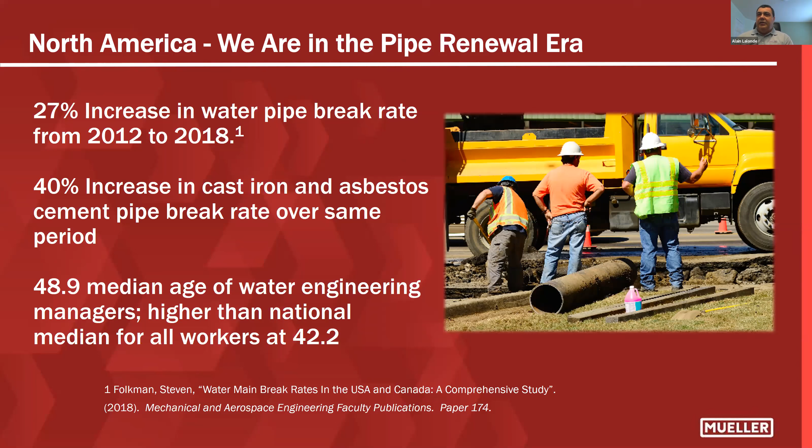So there's a lot of knowledge that's about to retire. It's really important for utilities to take that knowledge and make sure they get it out of those water operators, because as they leave, the new managers and engineers coming up behind them are going to be faced with a real challenge replacing and renewing these pipes in the ground.

If we look at managing our pipe renewal, it's a real balancing act, because we want to be able to extend the asset life if we can. If we're able to make the asset live a little longer and not have to replace it, there's obviously a benefit to that. But we also know that at one point we have to renew our assets. And if we look at the group that deals with asset life extension, there's a lot of water loss and real loss management programs out there that tend to help extend the asset life.

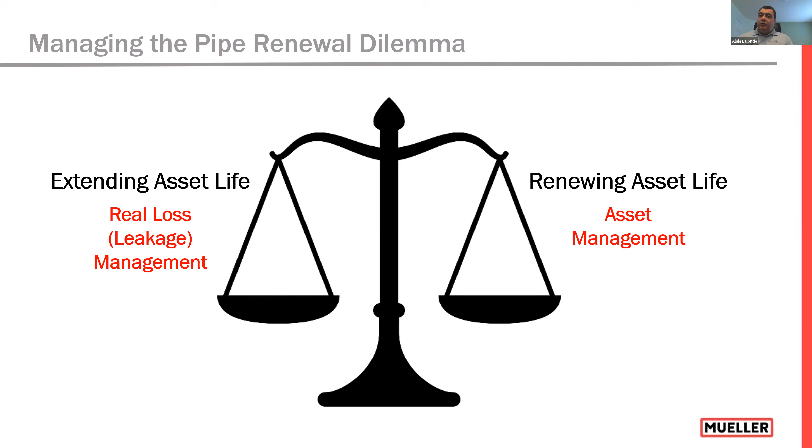On the renewal side, it's really the asset management department and municipalities that dictate the capital improvement programs and the budgets associated with that. What I've seen in my experience is that because those groups are on either side of the balance, they often don't share the data. There's definite synergies between those two groups that need to be shared and discussed, because the information of one or the actions of one affect the other, and the information gathered by one is very useful for the other group to make decisions.

So if you look at the real loss management side, those of you familiar with the IWA and AWWA water loss methodologies are very familiar with this particular graph. When you're looking to reduce leakage in a distribution system, you're looking to do 4 key things.

Obviously, you need to go out and do your active leakage control. You need to be active at finding leaks, and once you find them, you have to repair them, in a timely fashion and with quality repair materials so that the leaks are controlled properly.

And then there's pressure management. If you're able to manage the pressure and the stresses on your distribution system, you're able to reduce the level of loss. Pressure management is really one of the key factors to help extend the asset life in your distribution system. But last but not least, there's pipeline asset management, because at one point there's only so many Band-Aids we can put on a distribution pipe—we have to replace it eventually.

But you have to do all 4 of these components in harmony, and the harmony is a little different system to system, depending on how it's made up and the conditions in your particular distribution system. Some of us—I was one of them—were purists on the leak detection side from the start of my career. I didn't pay much attention to the pipeline asset management group. Now that I'm with Mueller and paying more attention, I see the synergies between them better.

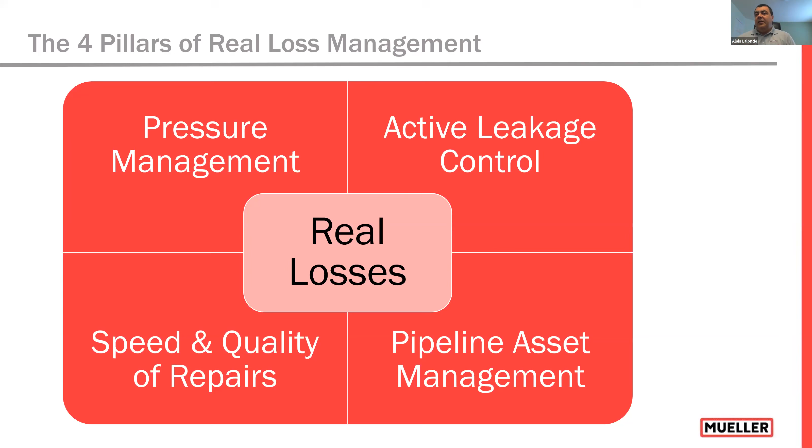There's a lot of information from water loss that needs to feed into your pipeline asset management component, and vice versa. To help us, we have our M36 manual here in North America, the Water Audits and Loss Control Programs manual, which helps prioritize programs to address these 4 key pillars to reduce real loss in our distribution system.

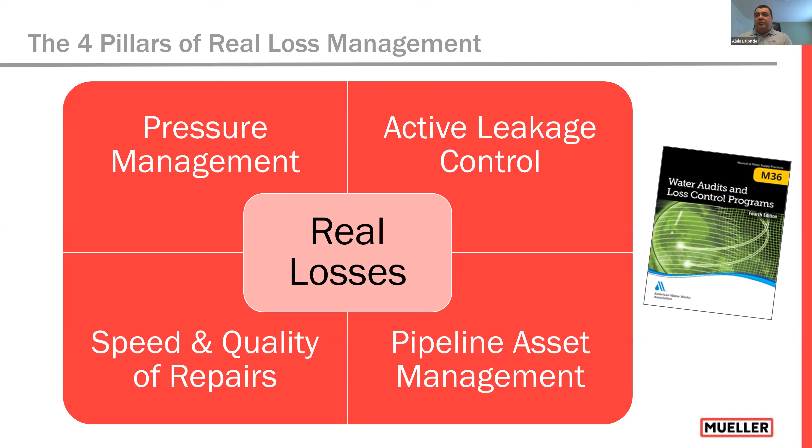When you look at asset management managers, they're dealing with determining the right amount of condition assessment to do on their distribution and transmission piping so they can make very informed decisions on their capital improvement programs. So they're looking at it from a different perspective, using varying tools to get the information they need.

And obviously it can start with a simple desktop model or using new software programs—we'll talk a bit more about some software programs that use AI and machine learning to help evaluate your system.

And the reason we're dealing with an inverted pyramid is that as you work down the pyramid, the risk associated with doing the various inspection methodologies, and also the cost of doing them, increases. So you want to apply it on a smaller proportion of your system and stop at the point where you have sufficient data to make your decisions.

And in North America, to help us deal with condition assessment, there is the new M77 manual out there that talks about the inverted pyramid method and goes into great detail on all of the different condition assessment methodologies that are out there in the marketplace.

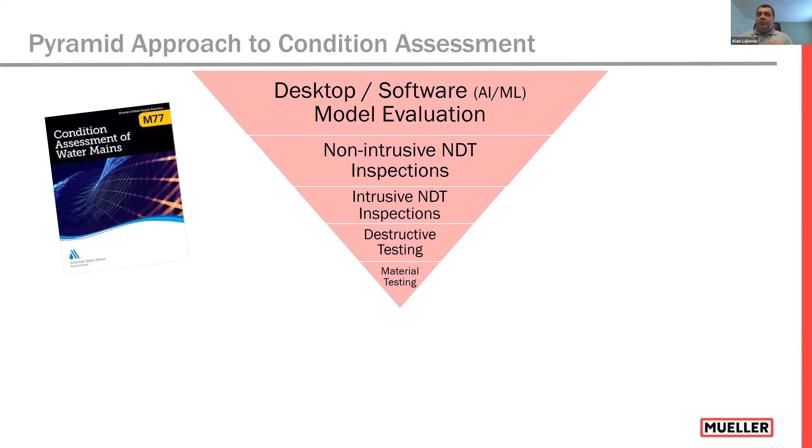Hopefully that ties the two together, the water loss side and the asset management side. On a go-forward basis, I'm going to deal more with the asset management side, and the case study I'm going to present will be more on the asset management side, but I'll continue to make ties on how that information works well with the leak and real loss management side of things.

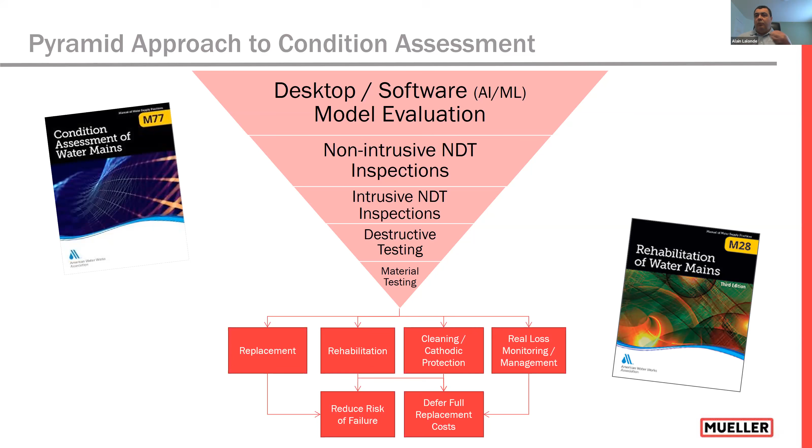To help us make decisions on which rehabilitation method to use, we have the M28 manual from AWWA that can help us decide what class of rehabilitation, or whether we should go to full pipeline replacement. When you look at making decisions, obviously if you don't have sufficient information, you can make the wrong decision.

One of our customers, Fred Pfeifer, the Water Network Asset Strategy Manager with WSSC, said something once that really stuck with us, and we've been using it in our presentations since. WSSC were at a point where they knew they were making decisions that pulled out good pipe. To Fred Pfeifer, if you're replacing good pipe, it's just like digging up money and then throwing it away, because obviously there's still asset life, there's still value to that asset.

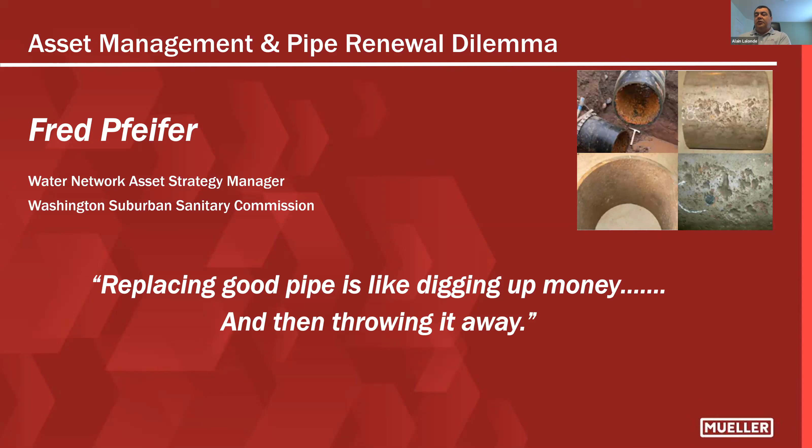So making sure you go out and get the right level of information, so that you make a more informed decision and make sure you make the right decision with renewing your pipes, is very important.

If we look here at the correlation - this is actual data from WSSC - what we plotted is year of installation of pipeline against the actual leakage rate of those particular pipelines, in leaks per 100 miles per year. If you put a straight line analysis through that data, you see that there's absolutely no correlation. So just basing strictly on age is not the best thing to do.

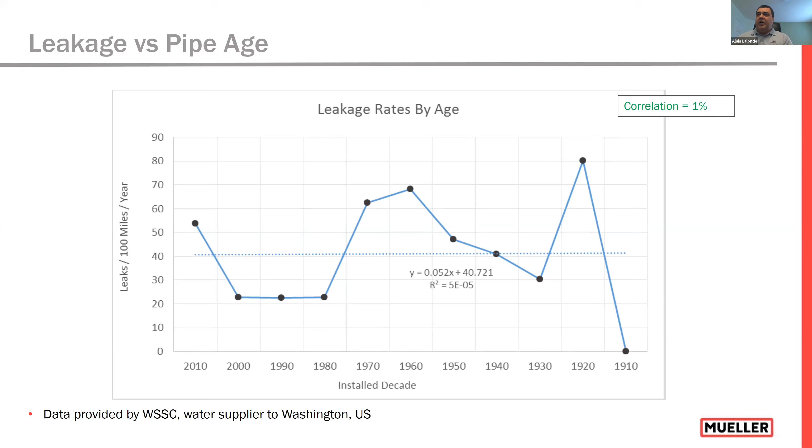A lot of utilities say, okay, I want to reduce my leakage rate in the distribution system, so obviously I'm going to go out and tackle and replace my oldest pipes in the system. Well, this graph just goes to show you that if you go and tackle just the oldest pipes, you may not have the desired impact on reducing the water loss rates in your distribution system.

So you need to make more informed decisions about which pipes to tackle first. We know as utilities now, and many of my customers have told me, that their current decision-making matrix has reached a point where they're pulling out good pipe. When we first started down the asset management road, it was very easy for utilities to identify the first 2-3% of really, really bad pipes - it's a no-brainer to pick up that low-hanging fruit and go out and replace bad pipe.

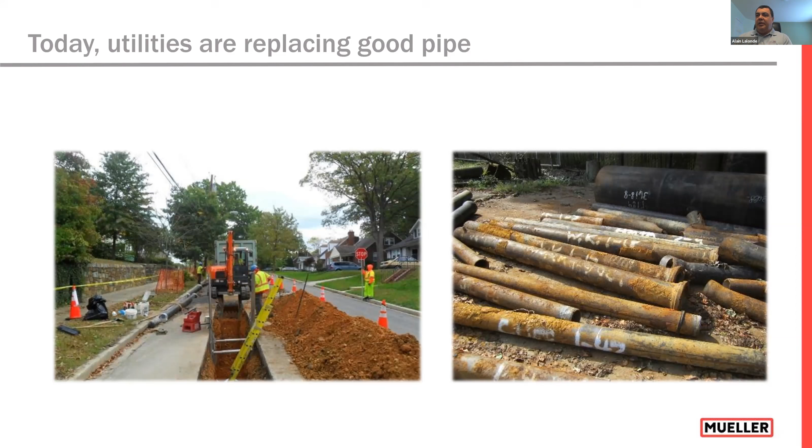But when we get into the middle, we do not know whether we should be replacing street A before street B if we don't have evidence-based information. So we have data - we have a lot of data - and that's where some of the desktop modeling tools come in.

We have data and we're trying to make decisions based on age of pipe, type of soil, and break history, and we're making rules and trying to organize that particular data so that we get actionable results. Now we need a lot of tools, and there are tools out there to really help and improve our decision-making process for analytical analysis of historical data.

That's where these new software tools come in - one I'll talk about is Pipe Insights. It's a new machine learning tool that's out there to quickly analyze a whole slew of data. Data is not the issue - we have tons of data. Interpreting what that data means, seeing trends in that data, and identifying ways to manage those trends to get better, more actionable information is where we need the help of machine learning tools.

So by learning from the pipe's behaviors, we're able to predict the likelihood of failure, and we're able to improve the data from these analysis models so that we can make clear decisions moving forward on what to do next with our particular pipes.

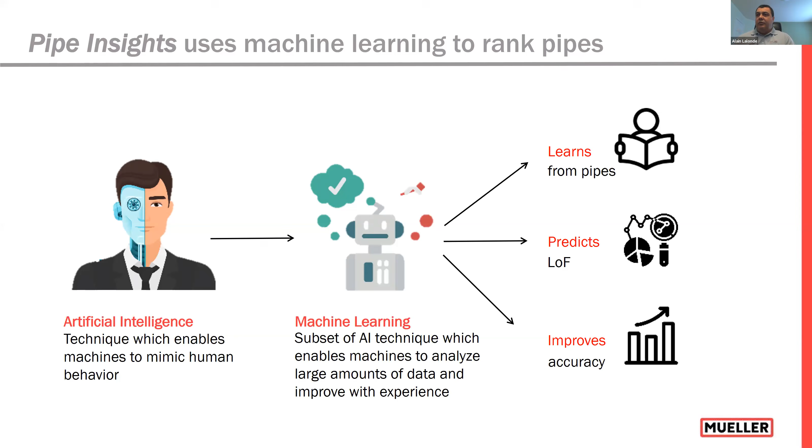If we look at Pipe Insights and machine learning algorithms in general, there's tons of utility data. Data will have GIS, pipe installation date, break history. The majority of utilities out there have gone into the digital world and have that type of information digitally. There's also a lot of public information out there - soil surveys, historical weather, things of that nature. And then each tool will have their own proprietary data sets and algorithms. They'll run all that data together to try and identify patterns.

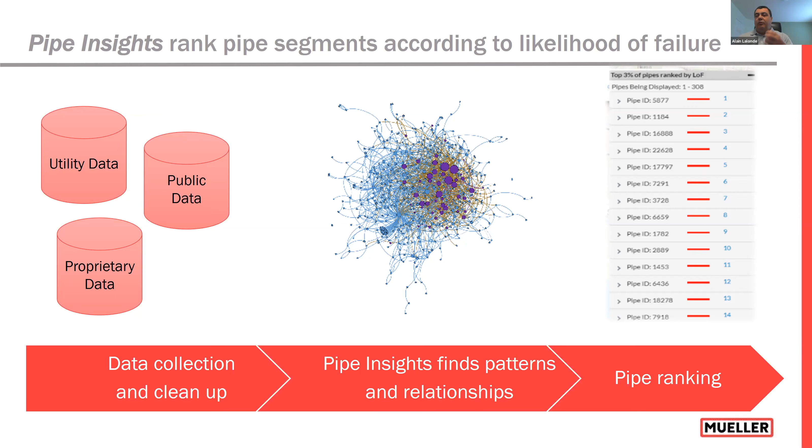From that will come the pipes most likely to fail. With that, now we can identify the top 3, 5, 10, 15% of pipes that are likely to fail, and then make decisions on those particular pipes - to either get condition assessment data, look at replacement, or do leakage monitoring. But at least now we know the worst pipes in our particular system.

So again, Pipe Insight takes raw data. Raw data is easy - we have tons of it, lots of internal data sources from the utility, external data sources, and then by using the algorithm, taking that information, we can develop a likelihood of failure.

Most software and Pipe Insights has the ability to add consequence of failure. So now you can add rules to give you consequence of failure, multiply it with your likelihood of failure, and get an even better ranking of pipes to prioritize. Now you've got actionable insights with that particular data.

You're able straight away, if you've got a very high likelihood of failure and a very high consequence of failure - you probably can't live with that, and you might make a decision to renew that pipe right away. But on the other ones that have less consequence of failure but a high likelihood of failure, you might go out and get condition assessment data, because you want to make a more informed decision of which pipes to replace first.

And then the other pipes that have a lower risk of failure and consequence of failure, you can look at monitoring for leak detection - either permanent monitoring or routine leak detection surveys - to be able to stay on top of those particular pipes as they degrade and move up in time.

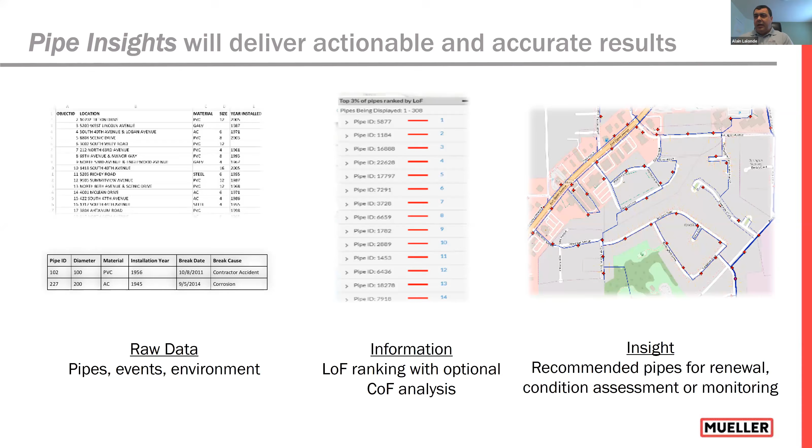So we'll look at one little case study that Pipe Insights worked on. It's not that little - it's actually a fairly large utility with 4,600 miles of pipe. What Pipe Insight did is they looked at about 10 years of historical data to predict the likelihood of failure of pipes in 2018.

The outcome of that particular analysis showed that 17 out of the top 18 pipes identified as likely to fail actually did fail in 2018. And the 18th pipe, which was actually the number 1 ranking, failed 2 months into 2019. So obviously this gives you more accurate data on your pipes and making decisions moving forward.

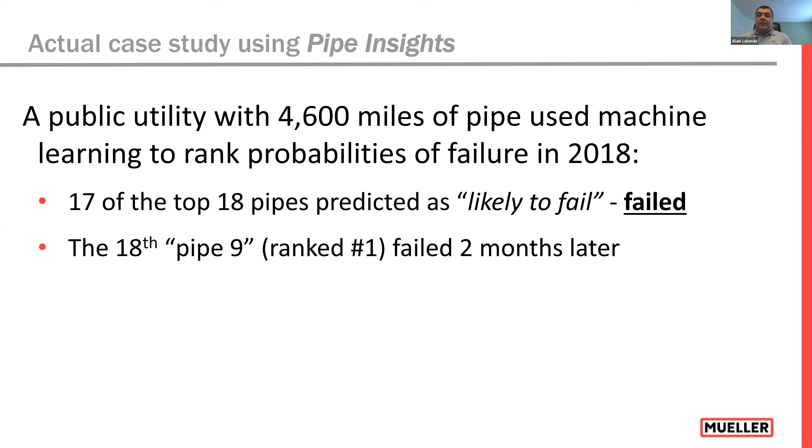This utility was Tucson Water. So they saw a new way of doing business with this particular data, and now we're more confident moving down into condition assessment, leak detection monitoring, and actually pipe replacement decision making.

So now if you take that same data that I showed from WSSC, but now you have other factors - you have actually gone out there and collected actual evidence-based condition information on the pipelines. You have age, you have soil conditions, and you develop a pipe integrity rating system. In WSSC, they've developed a rating system that includes condition assessment values between 1 and 5.

And now when you plot the rating versus the leakage, you see a clear trend. Obviously the more degraded pipes have the higher leakage rate - that's a no-brainer, of course we know that. But identifying those highly degraded pipes is really the difficult thing.

But with good pipe insights, good information, evidence-based information, we can rank our pipes, and now we can target the 4s and the 5s and do our replacement or renewal programs. And we know we're actually going to have a longer lasting effect on our water loss levels and our real loss levels in our distribution system.

We can also target the pipes that should look at leakage monitoring, and we can identify the pipes that can be deferred for several years before we even need to consider what needs to be done.

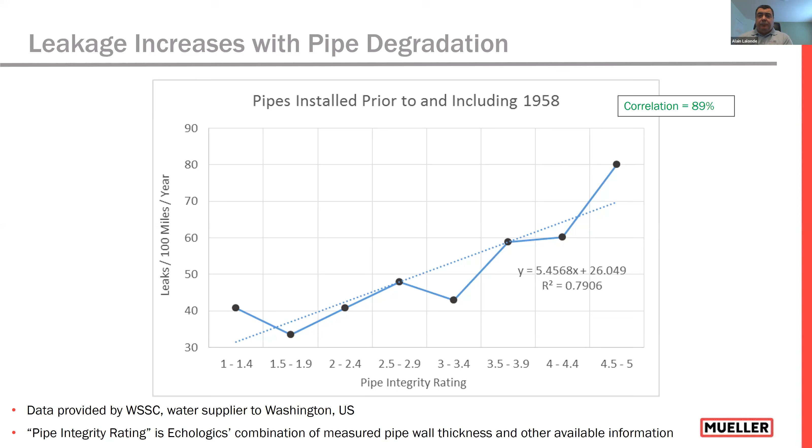So with that, I'm going to specifically talk about a case study. It's called the Region Peel case study, dealing with how they approached condition assessment and got to improve their asset management plan using condition assessment information. So just a little bit of history behind Peel region.

There's 3 major cities that are part of Peel: Mississauga, Brampton, and Caledon. And I actually live in Mississauga, right down here in the bottom corner. That's where we had the snow this morning. So for any of you that miss snow, you can come live in Mississauga and you'll get snow in May.

Little known fact is that Peel region is actually the third largest water utility in Canada. They service almost 1.4 million people. Only City of Toronto and City of Montreal have a bigger population base served with their distribution systems.

If you look at just the distribution pipes, there's about 2,500 miles of pipe, varying in size from 2 to 16 inch. We're excluding their transmission and feeder main system. They also have about 300 to 400 kilometers of transmission and feeder main, but we're concentrating here on the water distribution network. It's a really new system.

If you look at the development in Mississauga, Brampton, and Caledon, it's very recent, within the last 25 to 30 years, and predominantly it's all PVC mains. But if you look, they still have about 12% of their distribution mains, or about 315 miles, that are older metallic mains, ranging in size from 6 to 12 inch.

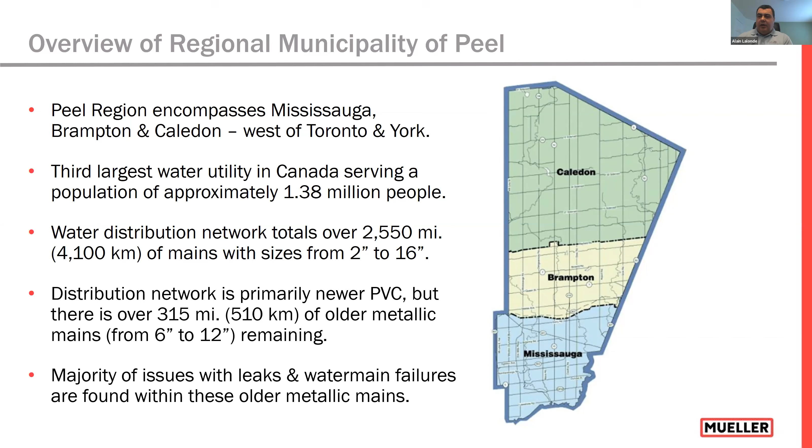So in Peel, they've adopted the State of Good Repair program. Many municipalities have adopted a State of Good Repair program. It's developed by the Good Roads Association here in Canada, and a lot of them are following the best practices in those particular guides.

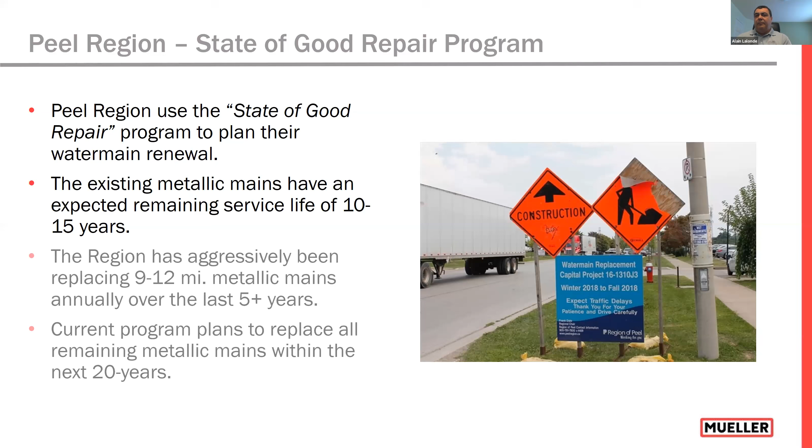If you look at traditional timelines associated with the types of pipes that they have in the ground, they figure they have about a 10 to 15 year remaining service life span. Doesn't mean that it's their actual useful life, but just based on age, they have about a 10 to 15 year plan. So over the last 7 years, the region has been very aggressive at replacing mains. They replace about 9 to 12 miles of mains per year, and are planning to replace all of the remaining metallic mains over the course of the next 20 years.

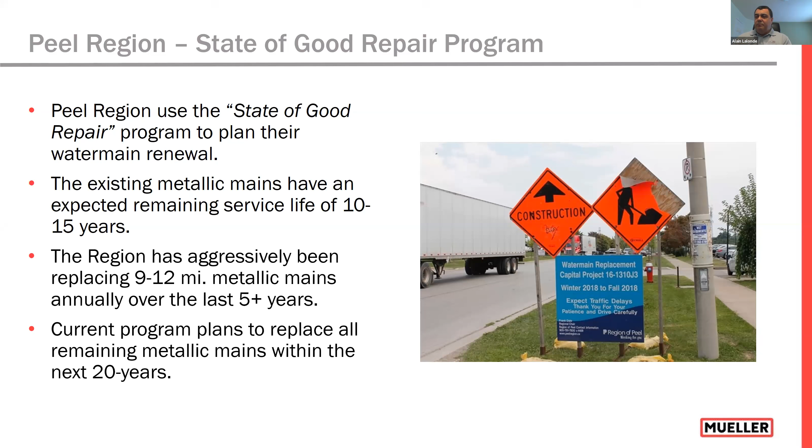So they knew the bad mains in the first couple of years, but they noticed that in the last years, they were starting to replace mains that maybe didn't really need to be replaced. So they were looking at their current matrix, and their matrix is totally based on a desktop analysis.

The 4 key parameters that they look at is pipe age. We saw that pipe age is not maybe the best indicator of pipe condition. They use a break frequency. So if a segment of pipe has seen more than 4 breaks since it's been installed, it's automatically lumped into a high rating for replacement or renewal program.

Obviously, hydraulic limitations and pipe criticality play into it, and whether the cities are also planning to do adjacent utility renewals for storm and sewer. But no, they've never had any actual evidence-based data on the condition of the pipes to make their decision.

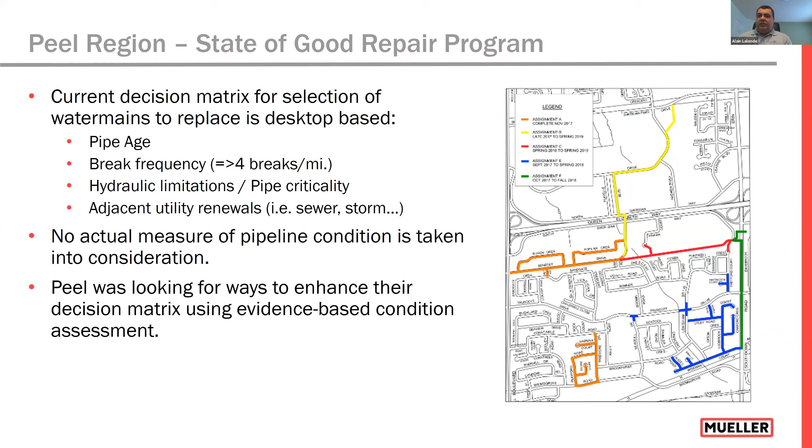So as they started pulling out pipe that was actually in good condition, they knew they had to look into something to help improve their decision-making matrix, and they had to bring some real condition assessment information into the mix. So they did market research out there of what was available for smaller diameter mains, and decided to do a pilot with the acoustic wave methodology from Echologics.

For those of you that are not familiar with acoustic-based pipe assessment methodology, it's really based on the correlation methodology from leak detection. So as you know, when leaks or flows or noise is induced in a pipe, it actually vibrates the pipe material and creates little acoustic compression waves in the water that compress and decompress as it moves down the water.

And it will actually flex the pipe material at a microscopic level. And those are the vibrations that we're picking up with our correlators to be able to pinpoint leak locations.

But if you take this principle, and again, when we do correlations, it's based on average velocity tables for average pipelines. But if you look at a pipeline that's brand new, if you've got a new metallic pipeline, it's very rigid, it's thick, it's got its full hoop structural strength. So it's going to resist that acoustic wave being propagated down that particular pipe.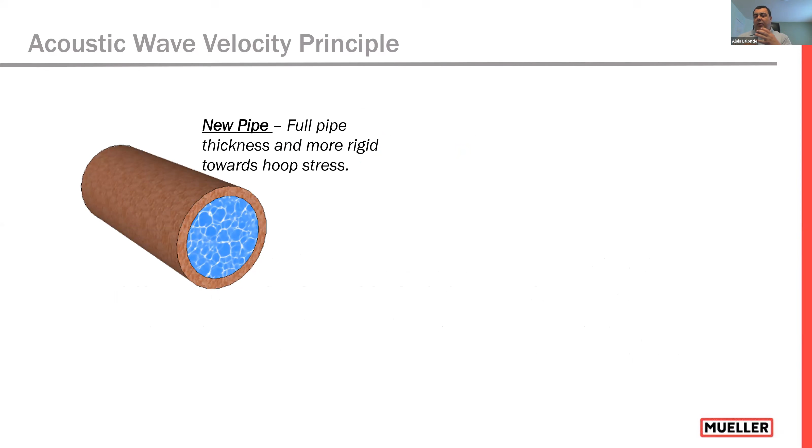But as a pipe degrades, it corrodes, it graphitizes, it starts losing effective thickness, and the actual structural thickness that remains is a lot less.

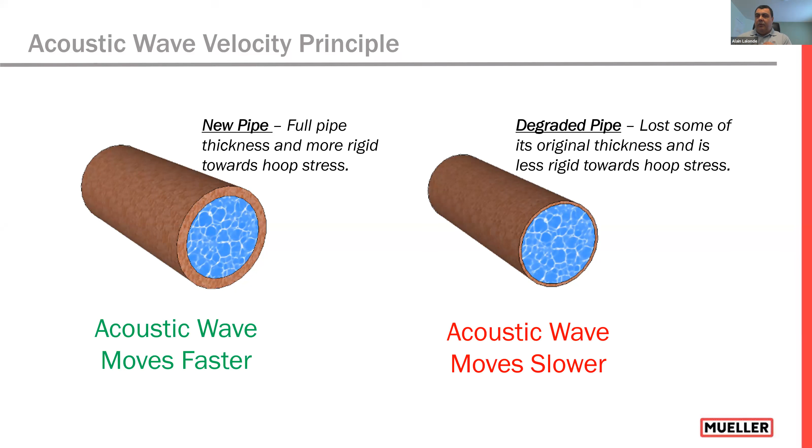So it will flex a lot more to the acoustic wave that travels through that particular pipe. If you're able to measure those waves, you're able to determine the amount of degradation, because an acoustic wave will travel much faster in a brand new pipe than it will in a degraded pipe. That's the principle behind the acoustic wave methodology for determining remaining wall thickness.

The setup is very similar to a normal correlation setup. We set up our transmitters on two connection points, demonstrated here by connecting to fire hydrants. The only difference now is we are inducing noise into the pipe. By activating a fire hydrant, either by flowing a small flow or tapping on it, we're actually inducing an acoustic wave into the pipeline.

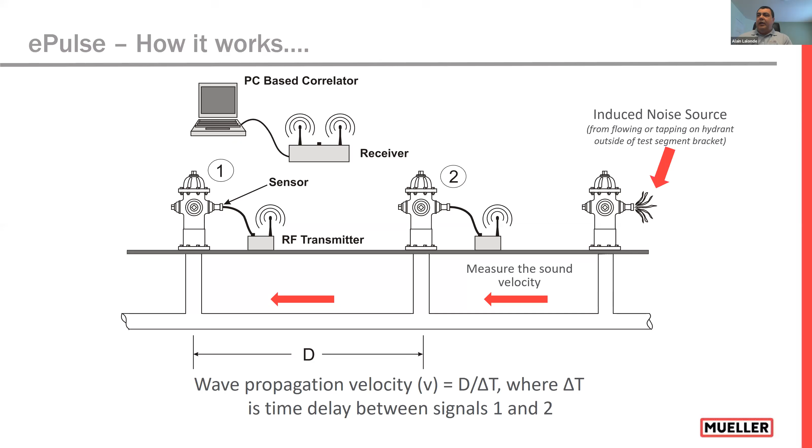We're able to measure the velocity of that wave between the two sensors, and by comparing it with material property principles of water and the metallic pipeline, we're able to determine the average remaining wall thickness on that segment, D, between the two connecting sensors.

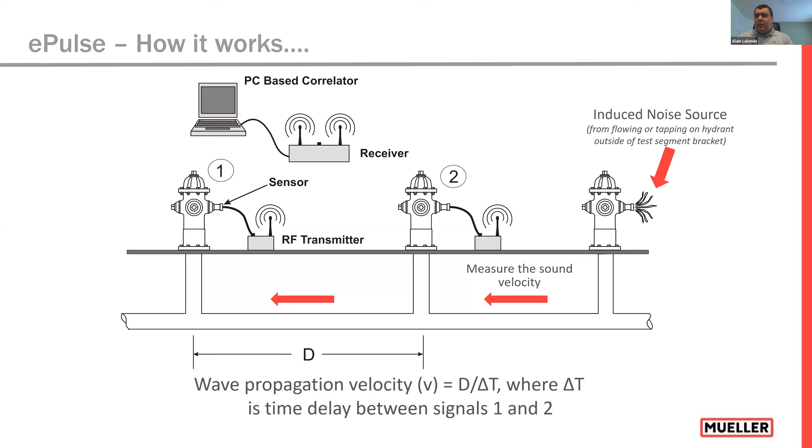If we look at a pipeline that's degrading, a metallic pipeline ages in the ground and can corrode from two ways: from the inside or the outside of the pipe. On the outside, the corrosivity of the soil acts on the pipe, and as it corrodes it starts to graphitize, maybe longitudinal cracks will form. That graphitized material is non-structural, so it has no impact on keeping water in the pipe or influencing the wave speed of acoustic waves through that water in the pipeline.

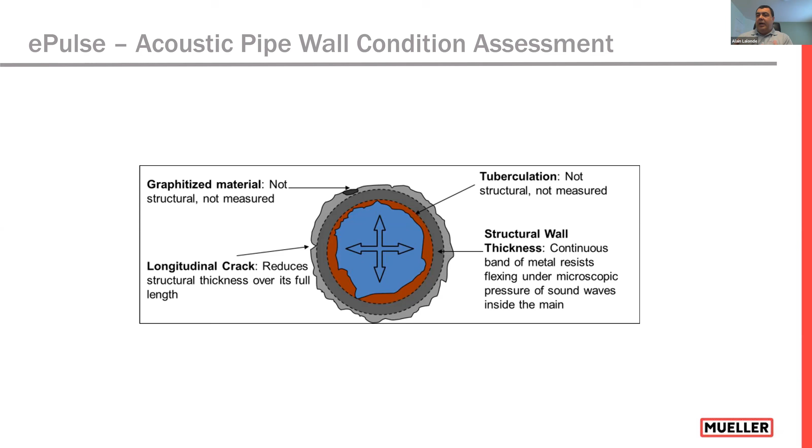Tuberculation, again, will cause potentially corrosion from the inside of the pipe, but again tuberculation is non-structural. It might affect how far the noise will propagate, but it has no impact on the velocity of the wave through that particular pipe. So the only thing that dictates the speed of the wave through the pipeline is the remaining structural thickness, shown here in the dark gray band.

So what we measure is an average pipe wall thickness between the two sensor links with ePulse. One of the key benefits of this methodology is we're also doing leak detection at the same time.

When we set up our equipment, we do a baseline measurement before inducing noise. By doing that baseline measurement, if there are any pre-existing leaks between the two sensors, we're able to localize that leak, get the acoustic signature, and report it back to the utility for repair. But we're also able to still induce noise in most cases and do our structural acoustic analysis, even though there might be a leak in that particular pipe segment.

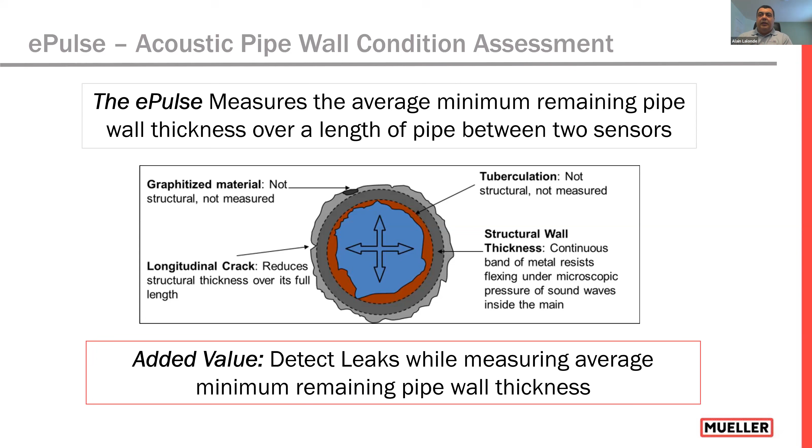This is a typical setup. It's not in Peel region, this one's actually in St. John's, Newfoundland. You can see here that our two sensors are set up on valves. We've got an average of about 400 or 500 feet distance between the sensors, and this is the pipe segment that we're analyzing.

We're creating our acoustic noise here. It's traveling down the pipe, and we're measuring the speed of sound as it travels down the pipe.

What's interesting about this project in St. John's is that for this 4 or 5 miles of pipe we surveyed, they had already earmarked structural rehabilitation of these mains. They were trying to prioritize which streets to do first, which is why we were brought in to do the condition assessment. When we were done, we had determined that the average pipe wall loss was 73% in these pipes, so there wasn't much left.

We found several leaks as we were doing the acoustic thickness measurement survey, and the city actually changed their scope from doing structural lining to doing full pipe replacement. Because with that limited amount of pipe wall left, they figured they'd get better bang for the buck spending a bit more money on a full replacement, getting a brand new system and a longer life out of it. So again, the information helps gauge the right rehabilitation methodology to go forward.

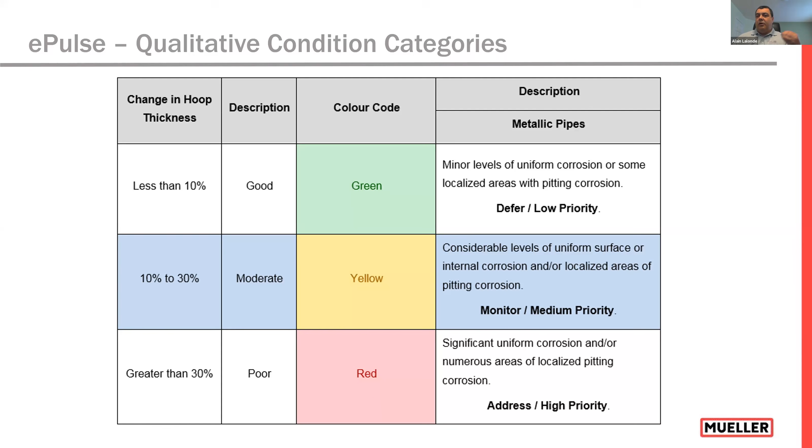We represent the information in a couple of bands. This is our typical banding, but we can customize it based on the requirements of the utility. Typically we look at under 10% wall loss as good pipe that can probably be deferred. Between 10 and 30% is your moderate range, where you want to monitor those. At 30% wall loss or more, you've got significant corrosion in that pipeline, and the utility should start considering what they should be doing based on the criticality and location of it.

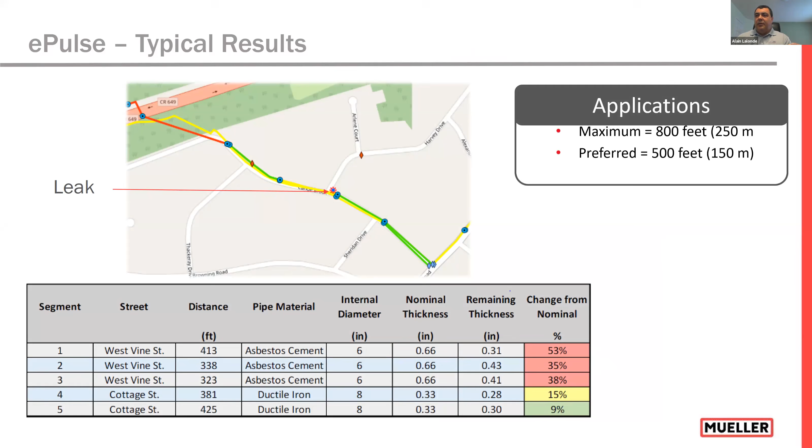It's applicable on cast iron, ductile iron, all metallic types of mains. It's also applicable on asbestos cement and reinforced concrete pipes such as PCCP and the C301 and C303 types of pipes. Typical distances between sensor points is about 400 to 500 feet, with a minimum of about 175 and a maximum of 800 feet when we do these particular surveys. It is very well validated.

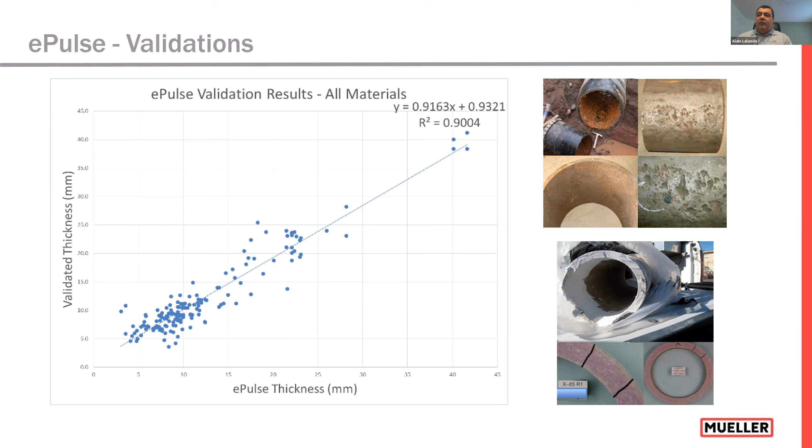There's been over 133 independent validations run by our customers, so they've exhumed pipe and verified the remaining thickness. You can see there's a very strong correlation, actually a 95% correlation, R squared of 0.9, in the data that we measure out in the field. So we give very accurate data, and you can rest assured you can make wise decisions moving forward with that data.

So if we look at the Peel region case study, they did an initial trial of 10 miles of pipe, and they really picked and chose. They looked at pipes that were already earmarked for replacement, so the decision was already made, they just wanted to verify they were making the right decision. They picked neighborhoods that had varying break frequencies, even though the pipes were of the same material and the same vintage.

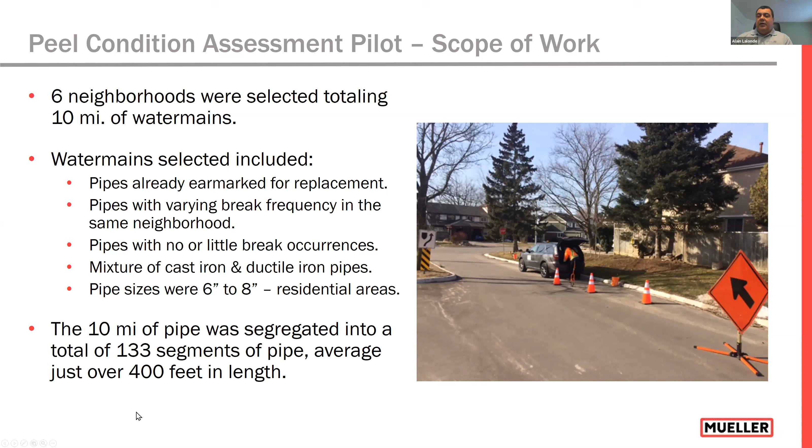They picked pipes that had no history of breaks or very little failure history, and then did a mixture of cast iron and ductile iron pipe, which is what they have in their remaining metallic water main stock. All of the water mains we tested were 6 and 8 inch, because that's primarily what's left in their distribution system. So we took the 10 miles of pipe, looked at it via their GIS information, and broke it down into segments, ending up with about 133 segments, averaging about 400 feet per segment.

The field testing was done in 3 weeks. So we averaged about 3,300 feet, or about two-thirds to three-quarters of a mile per day, which is what we tend to survey out there. And then there's the whole analysis. Yes, it was done in February, and as you can see, we can have snow in May, but we were still able to do this field testing in February.

What's key with our testing is we really don't need a tremendous amount of help from the operations staff, so we're not a big burden on them. I believe in the 3 weeks we were out in the field, we needed operations staff to come out twice, and it was mainly to make sure we were locating the valves properly. A couple of valves also needed to be cleaned, so we got a nice clean access with our acoustic sensor. So really the impact on operations is minimal.

What was key is that no excavations were needed to test all of these pipes. There was never any disruption to service, and we never needed to insert any tools into the pipe. Everything was done from the external, connecting to existing valves and hydrants in the distribution system.

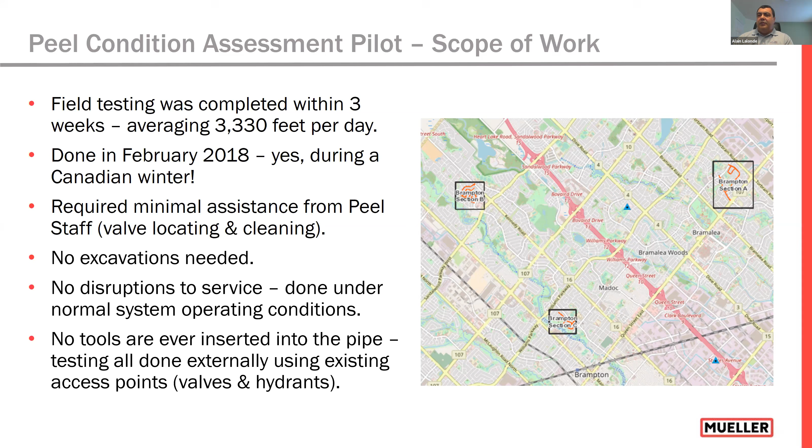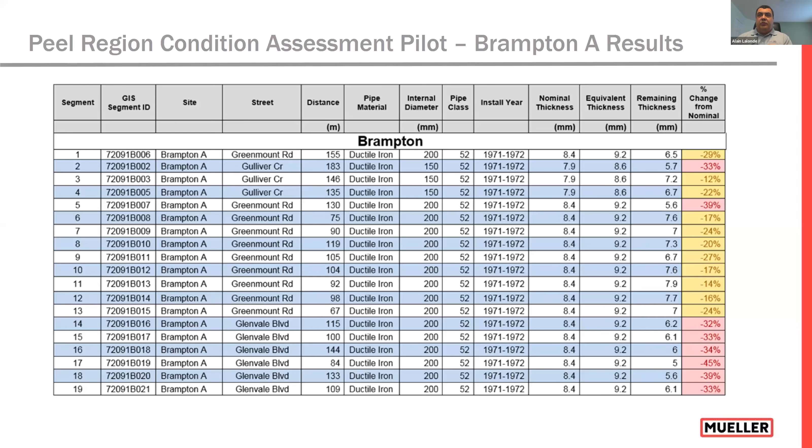So of the 10 miles that we assessed, 74% of it was in moderate condition, 19% was in poor condition, and about 7% was in good condition. The actual pie chart kind of matched what Peel anticipated. But what they were able to see is there's a big proportion of pipes that are just about to go over that 30% into the poor threshold. So they know they've got a wave of pipes coming, and can look at how to budget properly for their renewal program with this breakdown of information.

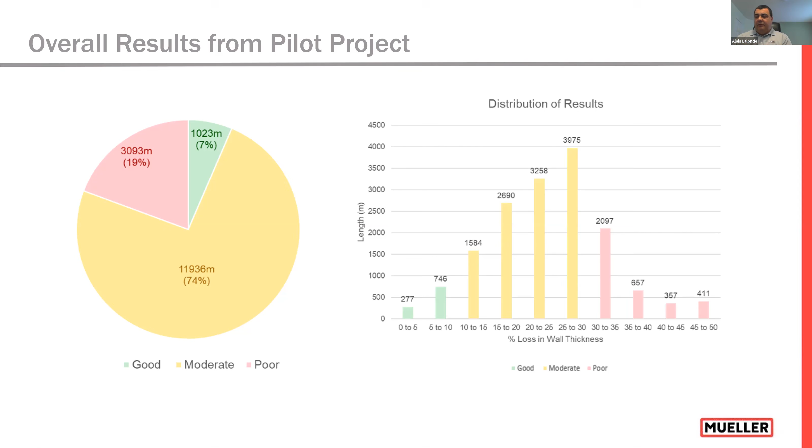What's a little more interesting is when we broke it down between materials. If you look at the cast iron, all of the good pipe, the 7% of good pipe, all of it was in the cast iron part. So that was a little bit surprising to them, a little less to us — we kind of anticipated some of that. There's a lot of old, really old, thick cast iron pipe that's still in really good condition out there and may not need to be replaced.

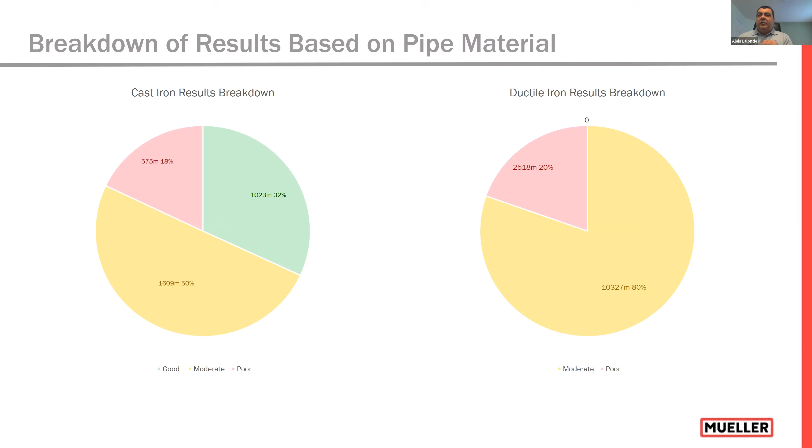So that's where age comes into play, but it's not necessarily always based on age. What was even more interesting to Peel when we dove into the data is we plotted percentage wall loss against age of pipe, and lo and behold, there is no correlation. So again, age is not the best factor. Just because a pipe is old doesn't mean it needs to be replaced.

That matches the WSSC data I showed earlier in the presentation. What was also interesting is that pipes identified to be replaced in 2019, a good proportion of them were actually in moderate condition, so they didn't necessarily need to be replaced right now. They still went ahead and replaced it, but it could have been deferred a few years because there are other pipes that should have been prioritized in front of these.

One key thing we found was pipe in poor condition that had no or little break information. There weren't many leak events in those particular pipes, but they were definitely in poor condition. So they would have never been identified with the current model Peel was using to prioritize replacement. Again, as I mentioned, none of the DI pipe fell in the good condition range.

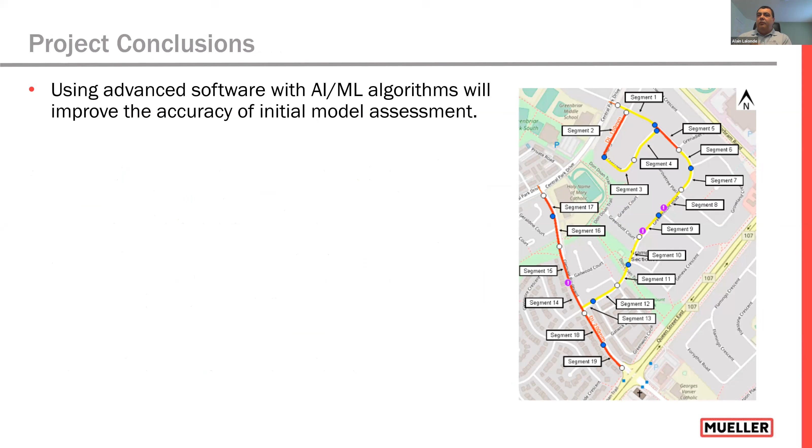So just to conclude, in doing this study, Peel identified that maybe their algorithm needs to be improved - maybe bringing in more advanced software, maybe using machine learning algorithms, might improve their initial model assessment to prioritize pipes that might need condition assessment.

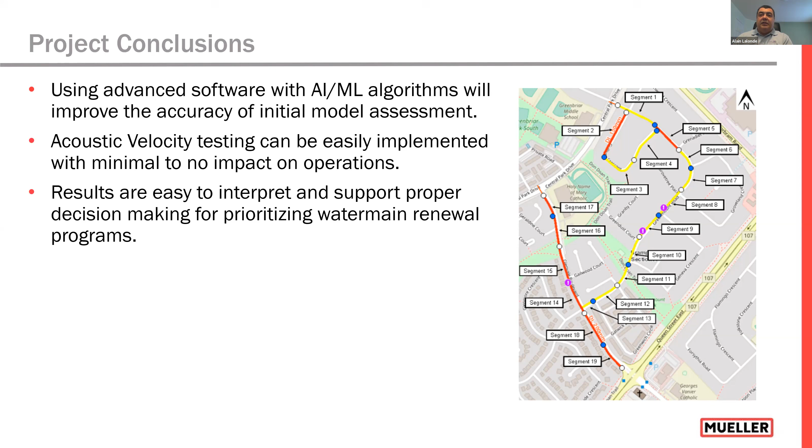They did prove that acoustic velocity testing was very easy to implement, that there was very little impact to operations, and obviously no impact to residents and customers. The results were easy to interpret according to their engineering team, and it made for much easier decisions on their pipe renewal programs.

One key benefit: in doing the 10 miles of pipe, we located 3 leaks, including 2 full circumferential breaks. Locations were pinpoint accurate, and Peel were very impressed with the accuracy at which we can locate leaks. And even though these leaks occurred, we were still able to get condition information on those segments of pipes.

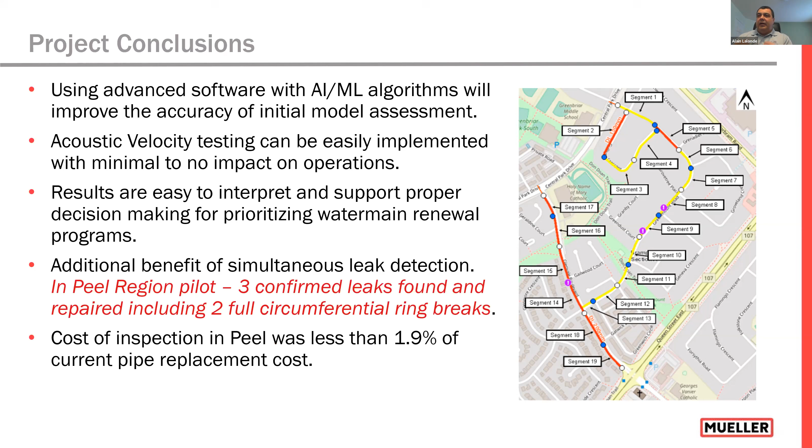If you look at the cost of inspection, it's about 1.9% of the pipe replacement cost. Obviously pipe replacement costs will vary quite a bit across North America, but for Peel it's a very low cost to get evidence-based information to help prioritize their pipe renewal program.

And now they are incorporating this information into their decision support system, and will continue to do so and link it back to GIS to improve their capital improvement program and their asset management program going forward.